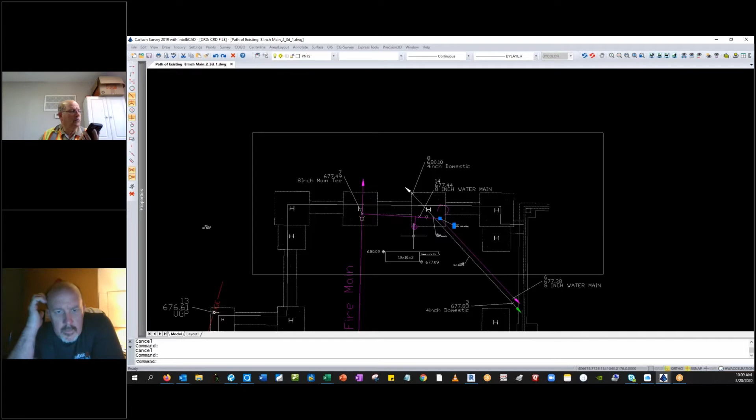Zoom into that where your mouse is right now, just a couple clicks. I just want to look here. So you've got a 45, a straight piece. Is that a clean out to the left? No, that's a PIV valve sticking up out of the ground. And that's a fire hydrant over there.

So there's a line going from the fire hydrant to the main. Yeah, a little bit short one there. Really, I don't even care about the fire hydrant or the PIV, I could have eliminated those.

It's just really the main focus is just the 8-inch line, the 4-inch domestic running here, and then the footers themselves. This thing here is a piece of concrete around the 45. I can take that off too.

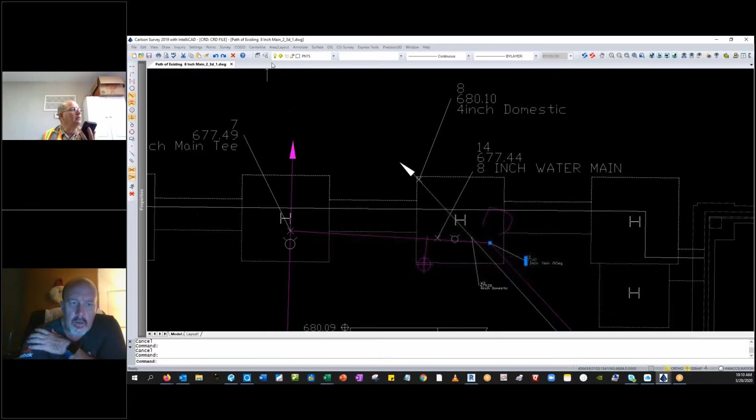Do you have the dimensions between them? You mean like from here to here, or from here to here? From the column line to column line. Oh yeah, right to left. I took the column line off of them, but I can get that.

Okay, about 20 foot. 20 foot center. So let's go into Revit.

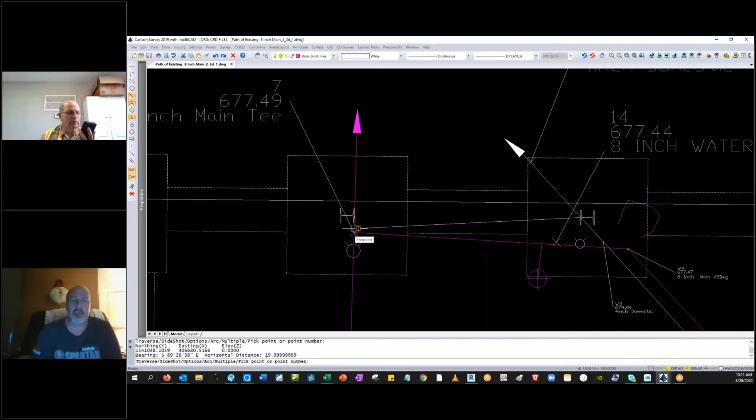Same screen. I went into a construction tab. That's where I saw. That's fine, that's fine. Go ahead and go to level 1 on your project browser.

Double click that. There we go, I did. All right, so let's go ahead and run up there to under - it's in datum, it's all the way to the right. You're going to see grids.

Keep going right. Keep going down, there you go. Go ahead and click on that. And then what you're going to do is go down into the model space.

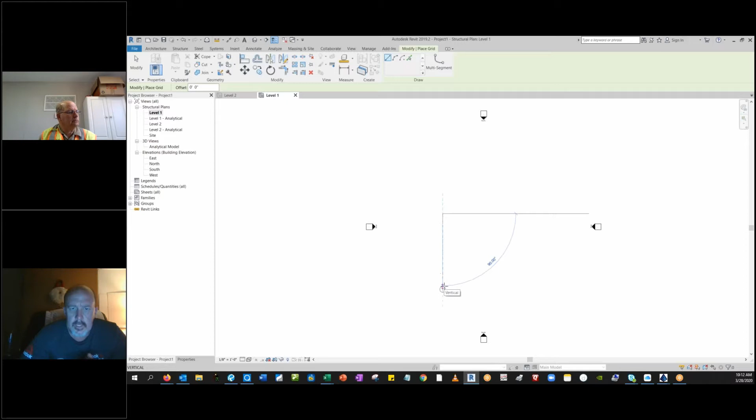Yeah, that sounds good. So let's go ahead and click there. Drop your mouse down a little bit and click there. And then move your mouse up and to the right.

And then type in 20, and hit enter. And then pull your mouse down until it lines up with the other one. You'll see a little blue dotted line. There you go, click there.

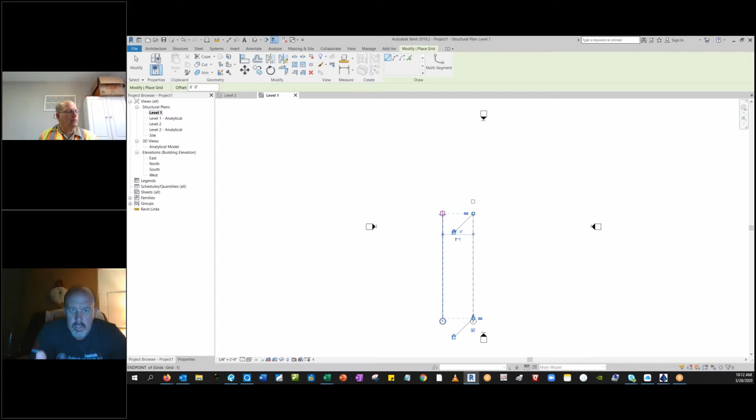And then go over to the left and up, we'll do it closer to the top. And then go to the left, and then go down a little bit. There, keep going down about right there. So go ahead and click there and then go to the right.

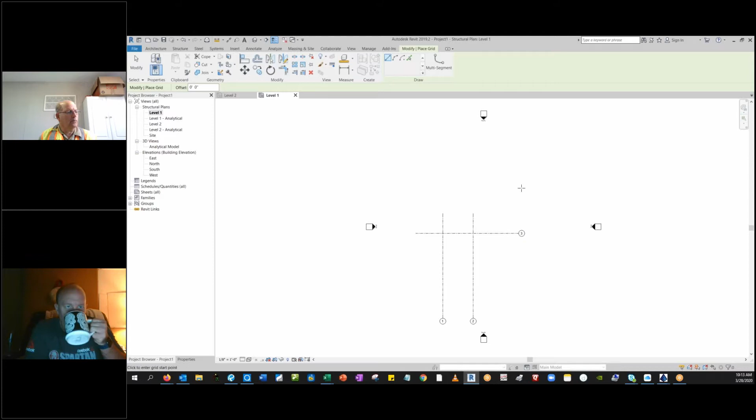All right, right there, and go ahead and click. Now go to the modify button, we're done with the grids for now. Keep going to the left a little bit. Yep, that one right there.

Okay, so now what we're going to do is go into the structure tab, which is right next to the architectural tab up at the top left. There you go.

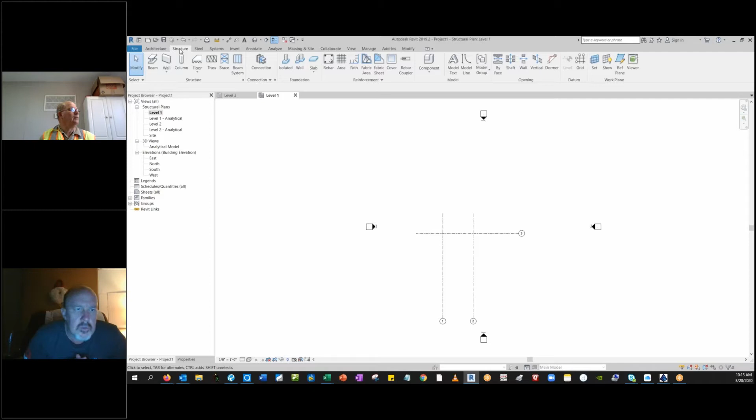And we're going to do isolated foundations. So go over there, down a little bit to the right. There, one more or two left, three, four left, two left. There you go.

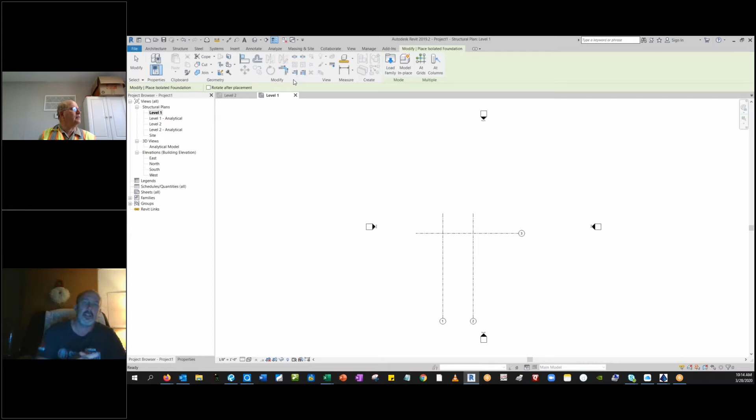And what we're going to do is go down to the properties palette down there at the bottom. Go ahead and click on that and then go up into edit type up towards the top.

And then we're gonna rename this. So up there, up and to the right a little bit. Down, yep, rename. And this is a 10 by 10?

Yes. Okay, so is it designated like F1, F2, or anything like that? Yeah, F10. Okay, so just type in F10. And then once you go ahead and hit OK there, change your foundation thickness, width, and length.

Okay. Hit apply, yep, and then OK.

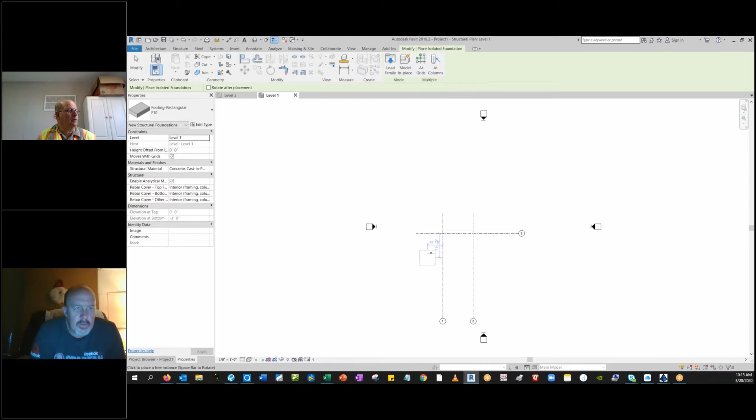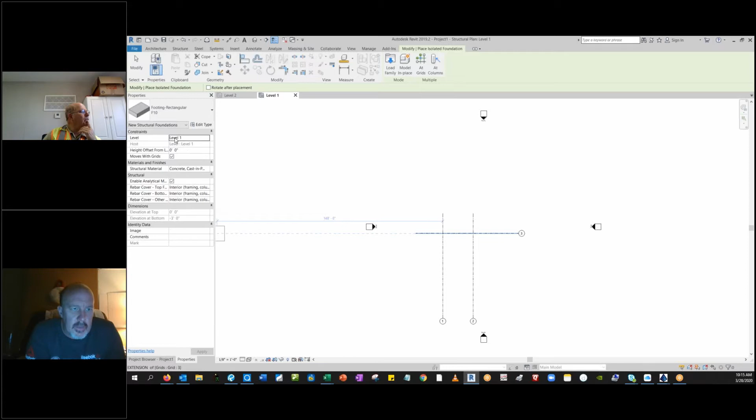Now over there on the left, how far down below finished floor do these sit? 5 foot. So you see up underneath where it says footing rectangular, and then you go down into the constraints where it says level, level 1, height offset from level. So 2 boxes down, click in there and do -5.

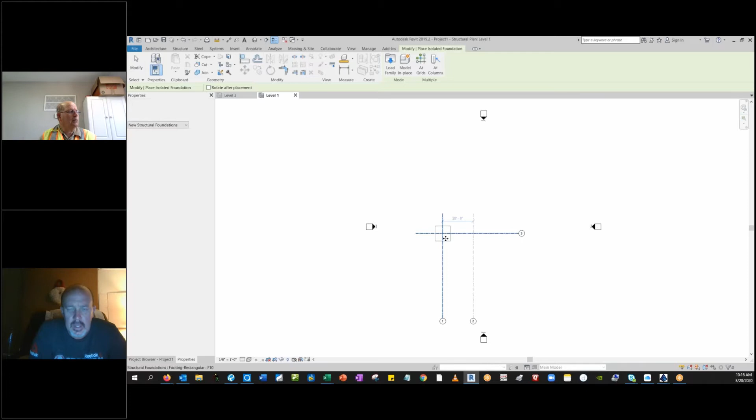Now move your mouse back over and then go to the intersection of those 2 grid lines and go ahead and click. There you go. And then go up to hit the modify button, or you can hit the escape key.

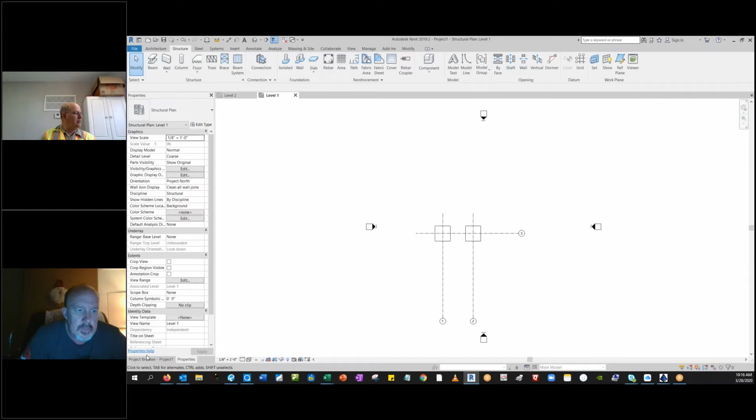All right, so now I want you to go back to your project browser. We're going to drop down to a 3D view. So down to the project browser, the bottom left, and see where it says 3D views.

We got analytical model. Go to manage. Manage tab up at the top, right around the middle. Up, up, to the left a little bit. There you go. And I was incorrect, go to the view tab. To the right, it was just next to the manage tab. To the left. Oh, there. There you go. And then we're going to do a 3D view.

See that little house down and to the left one? Go ahead and click on that. Yep.

All right, so you can see I kind of wanted to get this view so that we can see how things are running. So go back to your level 1. If you go up to the right, you're going to see level 2 tab, level 1 tab. Yeah, that way we can switch back and forth.

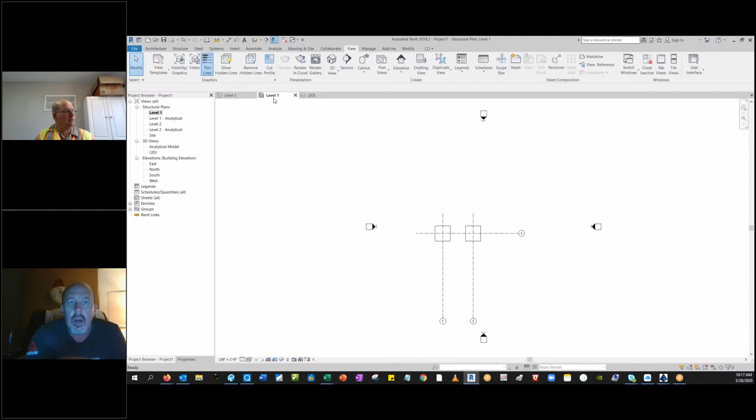Okay, go up to your add-ins tab, up and to the right. Let me see what you have. You don't have APL.

Is this job on True North? Slightly off. I'd have to check to see what the actual is, I mean, I can rotate it or whatever when I need to. No, that's fine, go ahead and drop into Carlson.

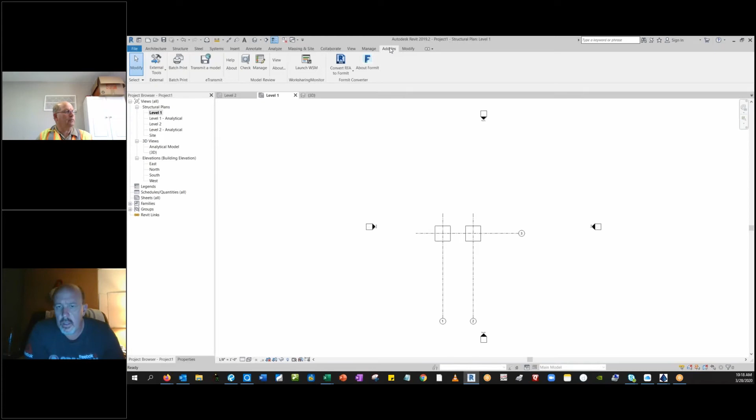Just open up your Carlson tab. Yeah, it is off a little bit, just a shade. 3322. Okay, go back into Revit.

These connector footers, do you want to add those as we go? We will. Really have to.

Do me a favor, pull that properties palette. There you go. Okay, all right, so what we need are the coordinates for the corners of those footings, we need 2. So whichever corners you want to use, we just need to have those ready.

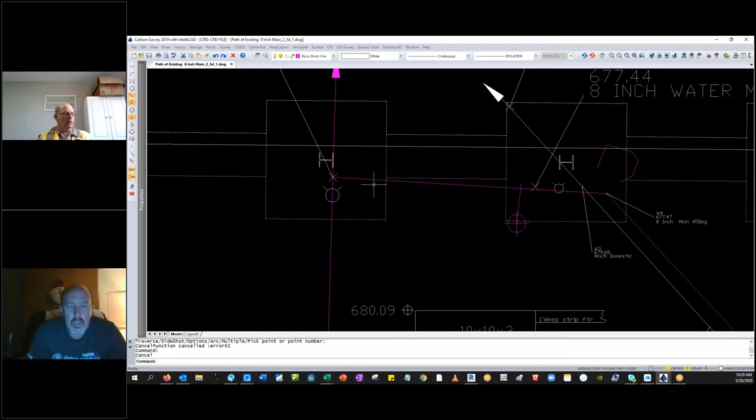Okay, I've got a CRD file and an Excel file in the folder that I sent you, and I have them here, of course. I can flip over to here, and I'll plot all those points and find out which ones we need. Let's see.

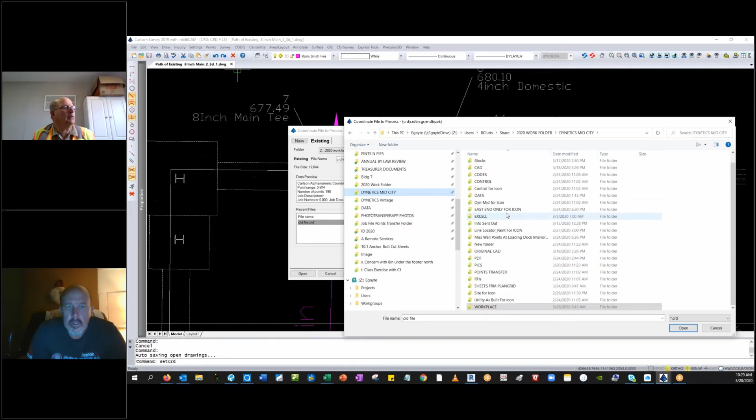Okay, just like this one footing? Yeah, we just need 2 points, so that footing will be fine.

105 and 106, okay, so let me get all that back off there. 105, 106. Now let's see, I need to manually type them in. Yeah, we're gonna manually input these. Okay, let me do this.

Yeah, you can throw that up on your other screen. I bring home my Yeti. Oh, I did, what color? Black, I don't even see it. My Yeti color? Your Yeti? Well, it's yours, but it's mine now.

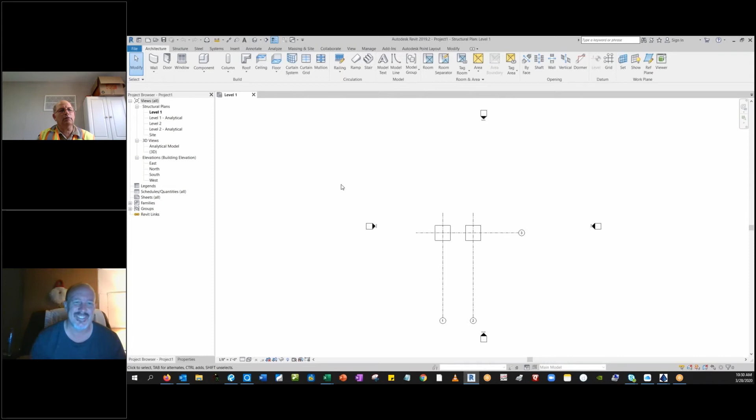Okay, all right, I've got the coordinates ready, and let's see, let me get that off here. Okay, I've got them on another screen where I can see them.

Okay, so go ahead and pull up Revit again, and we're going to go to the Autodesk Point Layout tab up at the top. It's about the middle of the screen. Yeah, when you say tab, are you talking up here? Yeah, those are tabs. So the APL is going to be about 5 to the right. Autodesk Point Layout, go ahead and then go ahead and get license.

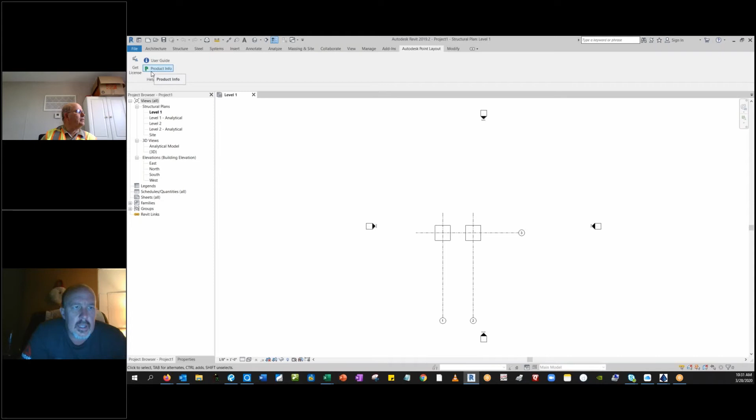Yep. Now you'll have to get a license every time you want to use this, but as long as you're on the network, you can get it. We have 3 seats, and not a lot of people use it.

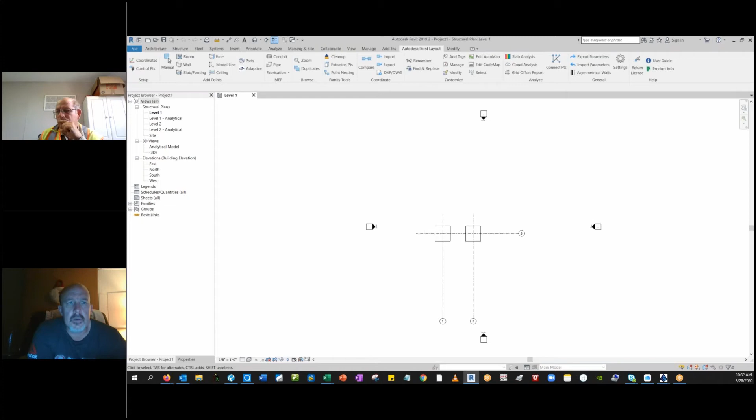So something pop up on your screen, on another screen? Single user or multi-user? Multi-user, yeah. It's got enter serial number. Did you do multi-user? I can click either one. Yeah, go ahead and hit multi-user. Okay, there we go.

Okay, so with APL, what we're going to do first off is we have to set the shared coordinate system for this. So all the way over to the left is going to be the coordinates tab, or the coordinates button. Go ahead and click on that. And we're going to do this in decimal feet, and we're going to do work plane.

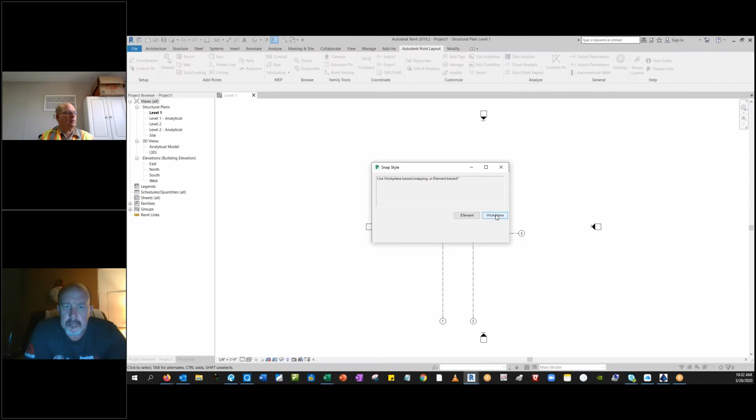So go down to where your point number 105 is going to be. This goes in easting, comma, northing, comma, elevation. We're doing the top of the foundation, right? Right, so we're going to do the easting first.

Okay, and then comma. Let me see if I did that right. 406656, 0526, good, 154, 1043, 343.

Can I copy and paste these? No, probably not. Okay, got it, go ahead and hit OK.

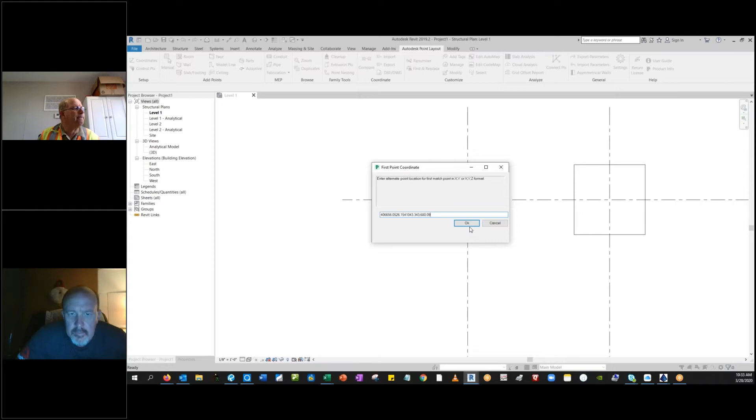Now do the other corner, number 106. Same thing. Okay, go ahead and hit OK. Oh yeah, check your numbers.

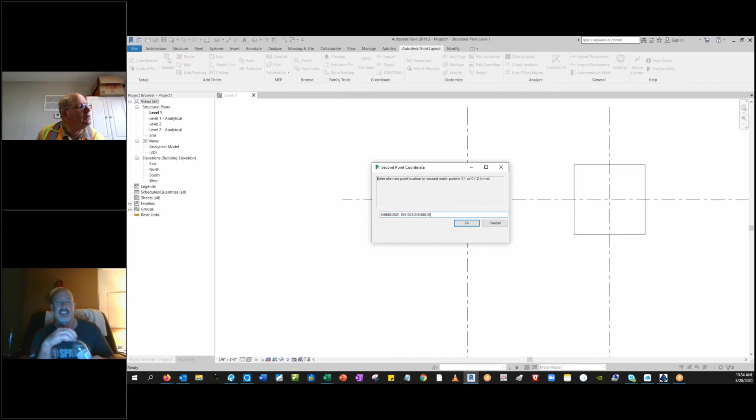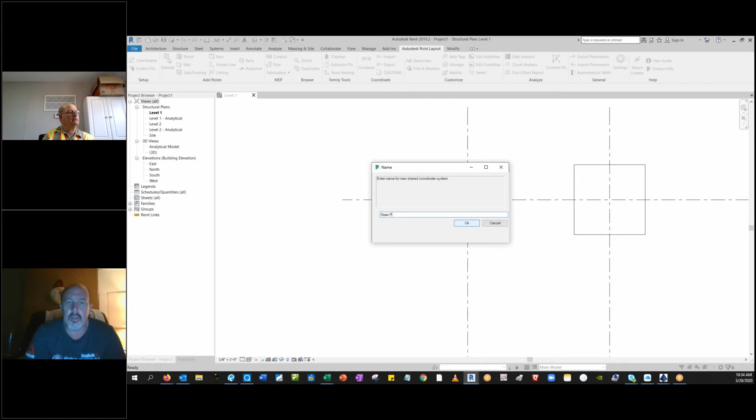All right, so I usually name it state plane just so I have it always, because you're working in state plane coordinates, right? Yes, so I usually do that and hit OK. All right, so I might have to break in just a minute to do something.

That's fine, let's go ahead. You have the points for the pipe, right? Yes, on a CSV. So go ahead and go to the import button right in the middle, just underneath add-ins. What we're going to do now is import those points for the pipe in.

So up at the top of the screen under add-ins, it's still going to be in the Autodesk Point Layout tab, but it's just located under add-ins. Down and to the right four. To the right, up, left. There you go, import.

All right, go down to select file to import, up at the top. Left, all the way, yeah, there you go. Okay, do I not have to worry about none of that, right? Not yet, not yet.

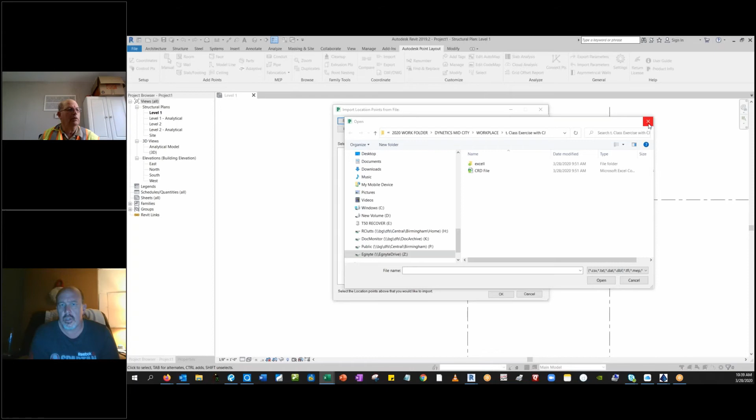Okay, I'm not really using it in Excel, because we just imported a CRD file that I made from Excel, but I do have the CRD file connected to the CAD that I'm using -- I mean the Carlson that I'm using. Don't close that, don't close that.

Let me change that, let's see. Well, I see -- no, you've got Excel open up at the bottom of the screen. Well, I do, but I mean, I didn't import Excel. I just used the Excel to create the CRD, which is what I just now imported, and it's right now actively being used by this one here.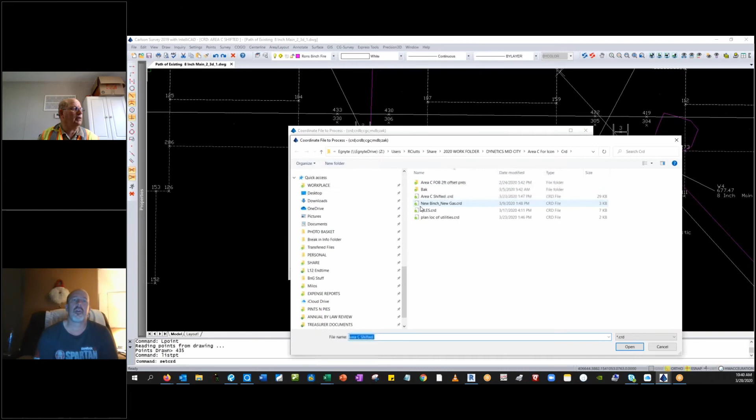So I could actually put another type file on there. Okay, so I'll just hook it to anything. Now it's not connected with it anymore. Okay, going back to Revit and importing.

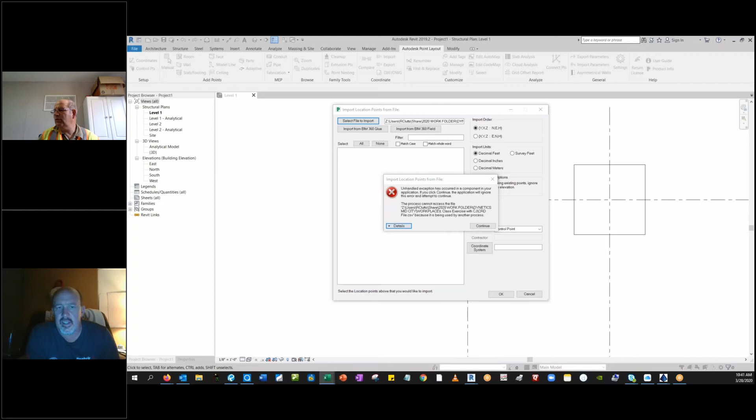File to import, CRD, open. Same thing. All right, I don't know, go ahead and close any connection out of Excel. Now try it, hit continue. It's still closing, okay. Now those are closed.

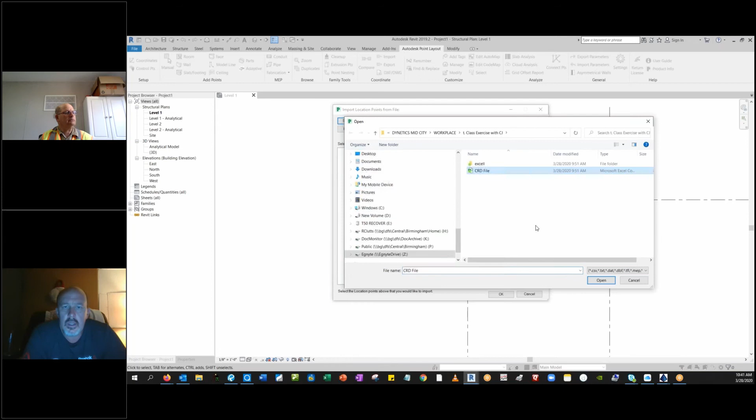I'll continue here. Yep. Now, let's go ahead and try that again. Select file to import. There we go. Okay, are all those what you need? Yeah, I think it's just the top 20 or so, right?

Yeah, I don't know why I got all this other stuff here. That's okay, just go ahead where it says up at the top, select all or none. Go ahead and select none. Okay, this XY thing -- never mind, just do what you say.

Okay, none. And then it looks like you want the 4-inch domestic, 8-inch water main, 8-inch water main, 4-inch domestic -- you need those, right? There you go.

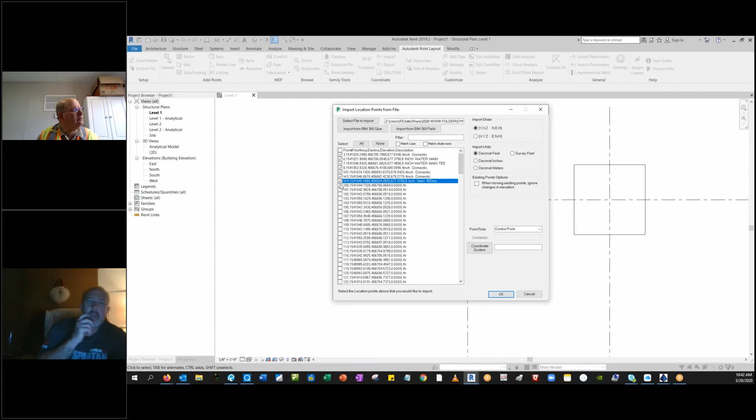Okay, so is that coordinate order northing, easting, elevation? Yeah. Okay, then the import order is good. Drop down to where it says coordinate system.

Now you don't have all the edges of your footers. We don't need those right now. Don't need those right now. Okay, all right, now.

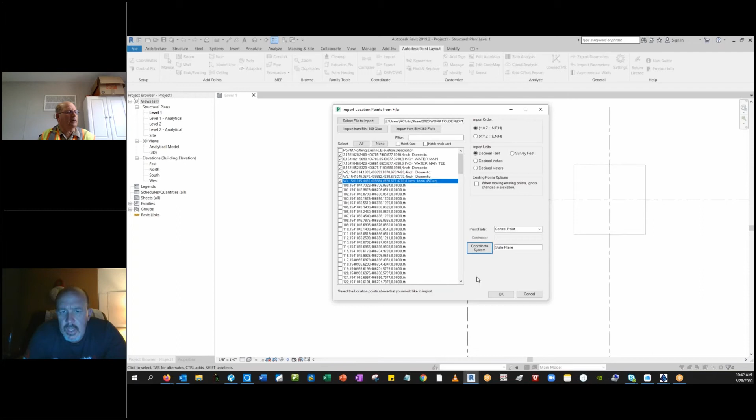The box where it says coordinate system, to the right a little bit, click on that. And then click state plane, hit OK. Now hit OK. And we're going to call it pipe.

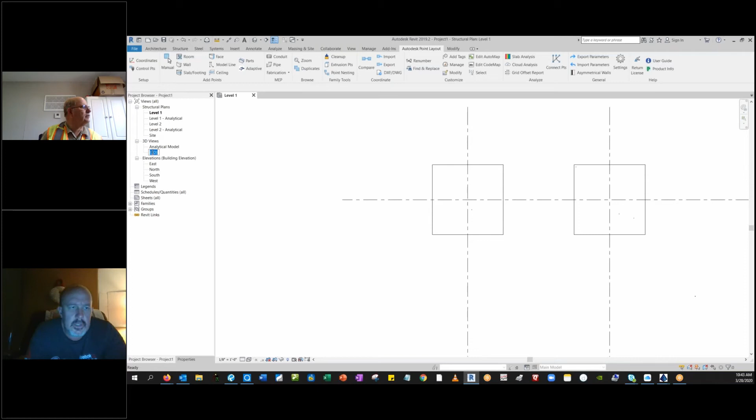And then go into your 3D view, so double click your 3D view to the left in your project browser. Yep, down, okay, one more. Double click that. Select off of it and try it again.

There we go. Okay, zoom in, and I believe we can see those points now.

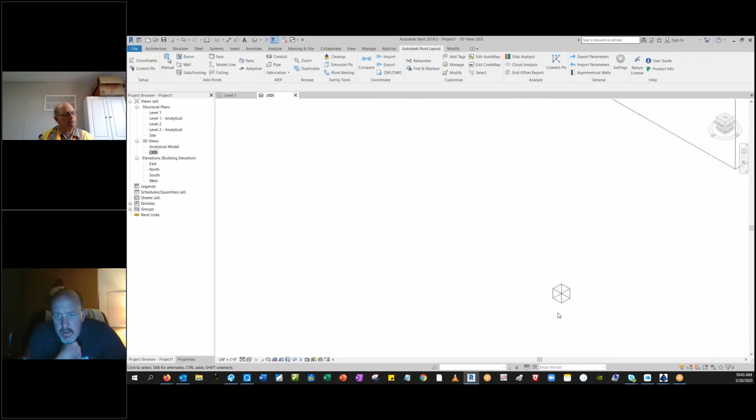Now, one thing that Revit doesn't do is label them on the screen. So what we're going to do is go up into connect points, to the right about 3 or 4, and then we're going to do filter.

All right, so if you scroll down, you want to do the 8-inch water, 8-inch main, 8-inch 45 degree, 8-inch tee, then hit apply. Yeah, we got it, hit apply.

All right, so you should have 3 points, right? Yes. See, that's the tee, that's the 45. Don't show the other one. That's okay, go ahead and hit OK. 45.

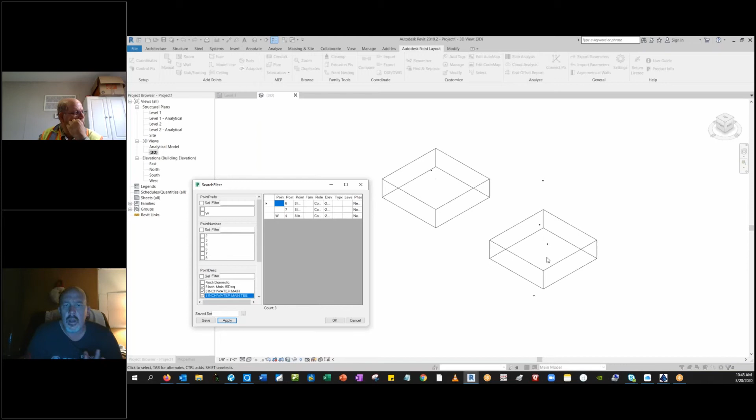And we're going to connect it with pipe, and we're going to do numerical. Top.

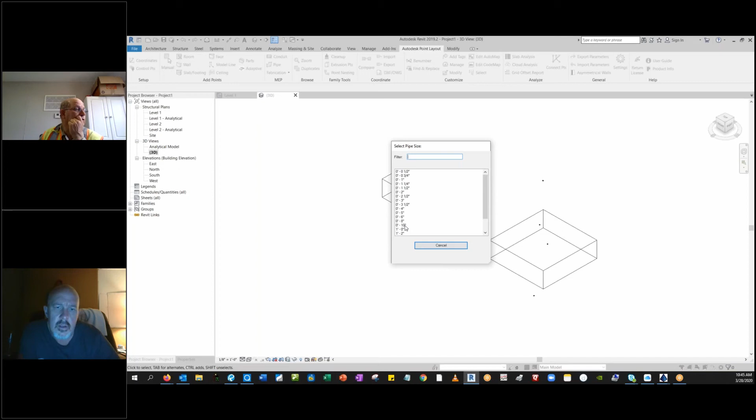Okay, apparently numerical wasn't going to work. I think from right here to right there, that's the 8. Okay, so let's try that again.

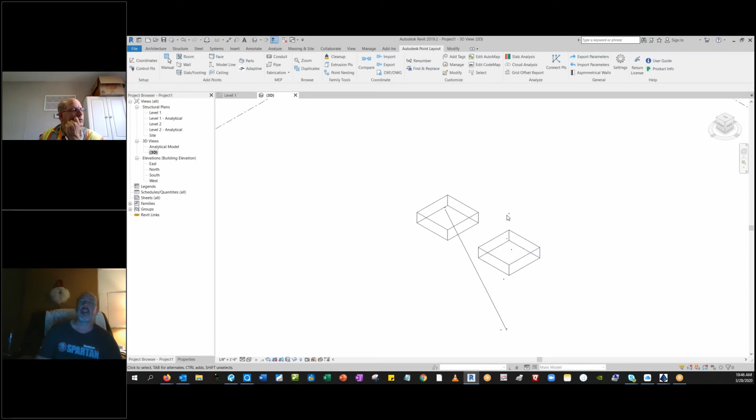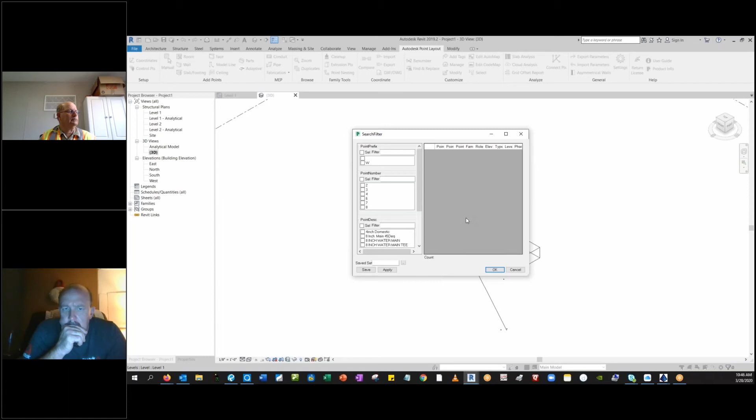Let's go back into connect points. Do I go backwards on my steps? No, we're going to delete that in a little bit. Okay, let's do filter again. Go ahead and select those 8 inches again. Hit apply. Oh no, back up. Yeah, you'll have to close it and restart it.

Hit apply. Yep, and then hit OK. Now this time we're going to do the same thing, pipe, but this time we're going to do all.

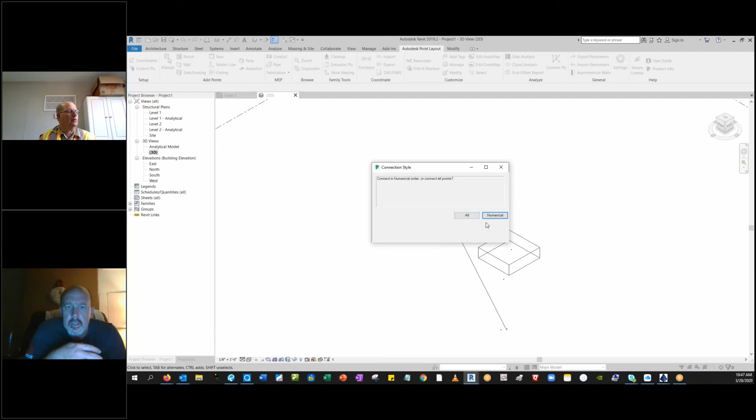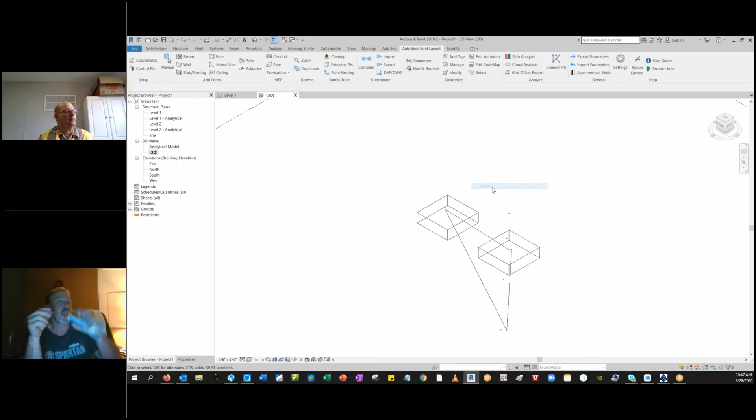There we go. Now go ahead and delete the one that's going in between the first and the last. Same, you'll have to do it again because we made 2 pipes there. Might have to do it a couple times. Hit the delete key. Is that what you normally do? Yeah, you can hit the delete key. All right, there we go.

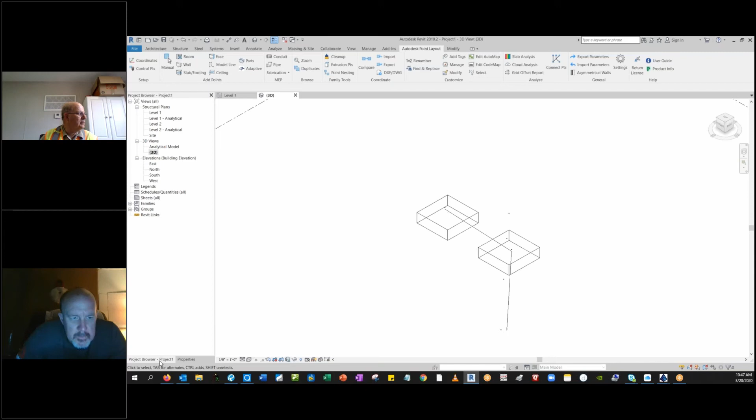All right, so in order to see this a little bit better, go down to the bottom left corner of the screen. You're going to see a checkerboard to the right, left down, left 2, one more. Yep, that one right there. Go ahead and click on that and do fine.

And then the one next to it to the right, go ahead and click on that, and do shaded. Oh, now rotate that a little bit. So how do you rotate? Hold your shift key, hold your middle mouse wheel, and push.

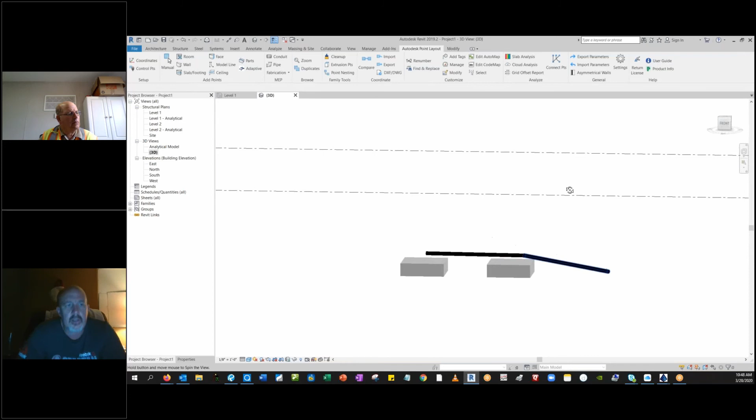Does that look right? No. Okay, should be below the footer. Go ahead and select those 2 pieces of pipe.

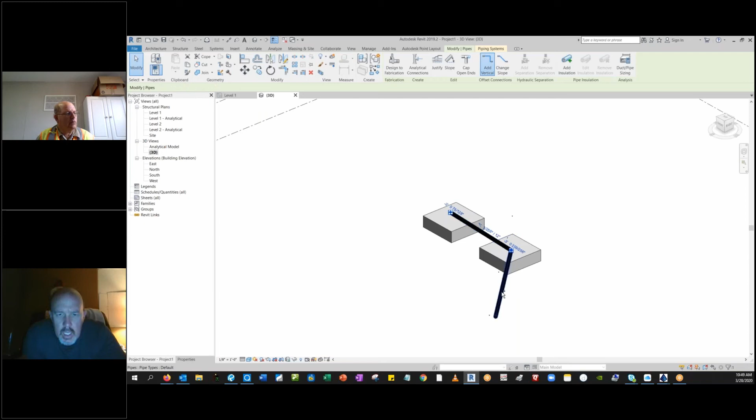Sometimes this happens, I have some problems with it, but go ahead and hold your control key and then select both of them. That's that one, I want to select both. What's still there? Let's see.

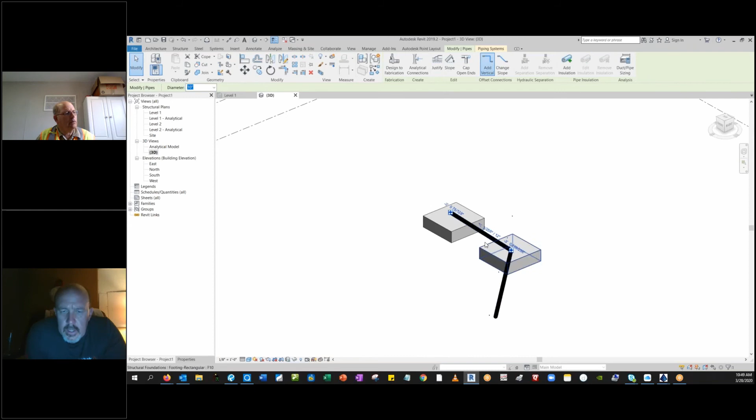Okay, hold on just a second. Zoom in for a minute right there at the end of the pipe. Turn it around, I want to be able to see that point. Okay, so that point is saying it's above the footing. Go ahead and select that pipe.

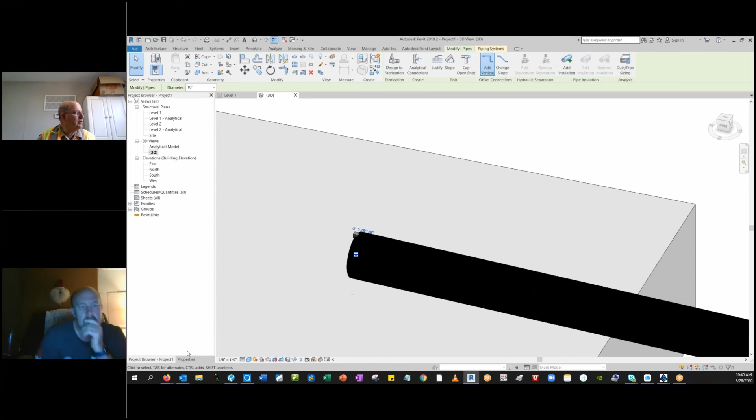Turn on your properties palette. Okay. Yeah, right there. Go ahead and click on the properties palette. There we go, all right, let's see here. Scroll down.

That number right there, is that supposed to be the top of the pipe right now, if everything's right? Or is that something else? I'm not sure why it's saying -3. Okay, you're below finished floor -3 foot, but your foundation's at 5 foot below finished floor, right? Right, and then that's going to end up being almost 8 feet below when it's done.

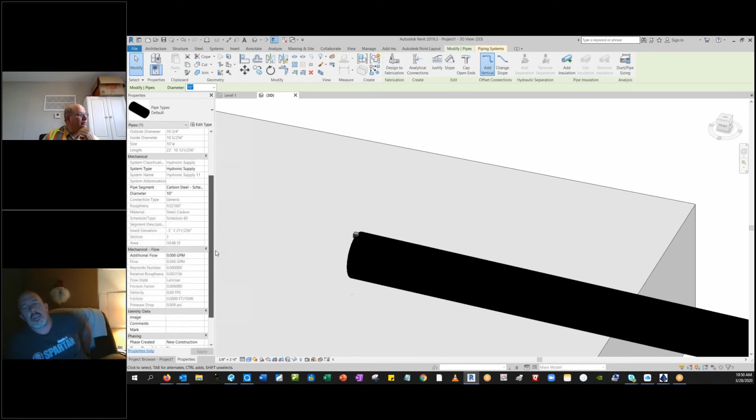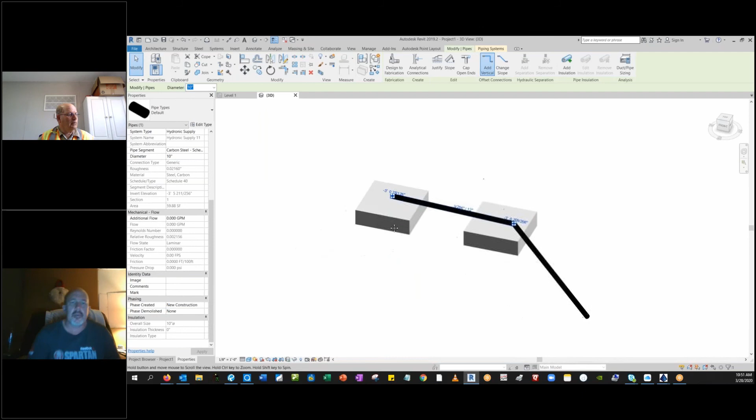So do this. Let's hit escape a couple times and select that foundation. -5. Okay, go over to the annotate tab. Left 2, 3, yep, right. Yeah, that one right there. And do spot elevation, one below it. And then hover over the top of that foundation. -5 foot.

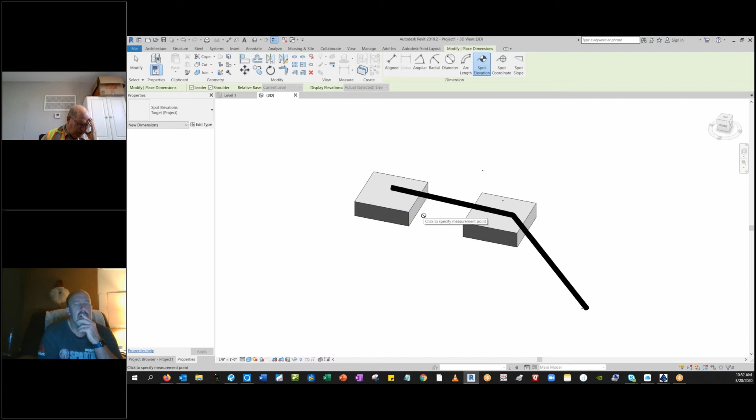What was the... I don't know that we ever established that. See, I put the elevation of those points in as 680, that's 680.09.

These here, what's your finished floor? 685.09. So when we put those two corner points of this in, I put in 680.09. That should have been right.

And then what's your elevation for those points? These points on the pipe. On the pipe itself, they're whatever I shot them at.

Let's see, you still got that up on the screen over there? I can put it on the other side where I can see it. Let's see... pipes. 45 is 640, 677.47. That's this corner right here.

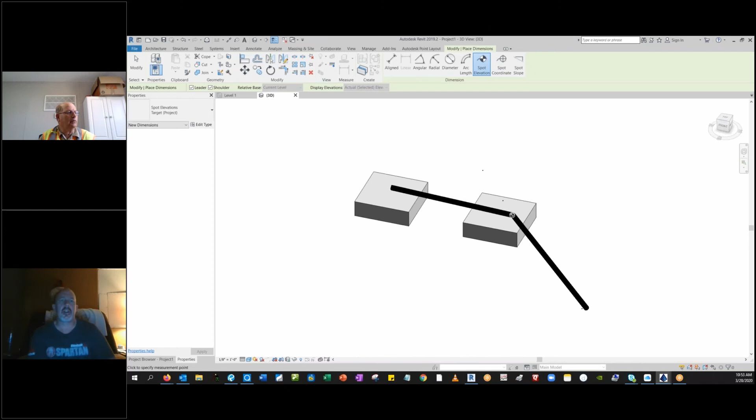Go ahead and zoom in, hit escape a couple times, and then select the point. Hit escape, and then select that point. Negative 2... oh, why is that?

Do me a favor, hit escape a couple times, zoom out a little bit. Select one of those foundations. Hit your control key and select the other foundation. Now go over there where it says height offset from level, hit zero.

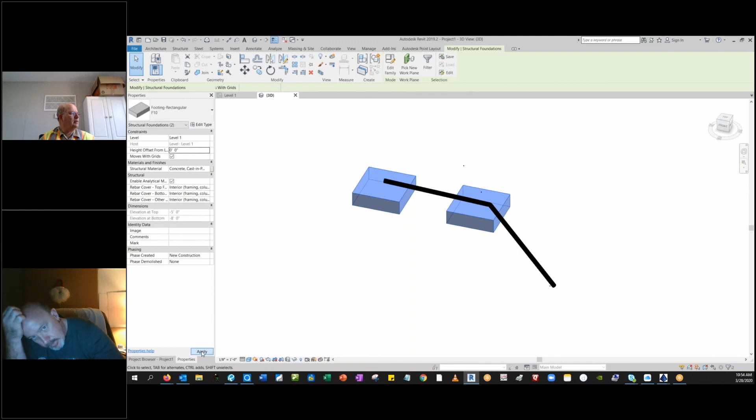Hit enter, now move the mouse over into the model space. Okay, now is that what it really looks like? Let's see, hit escape a couple times. See, shift. Yes, okay, yes, that's correct.

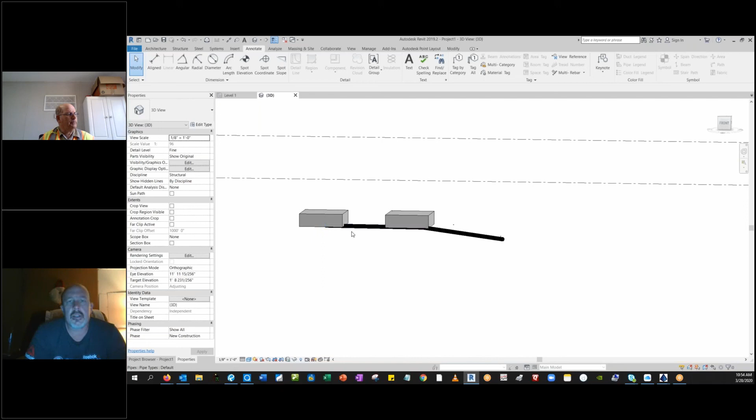Okay, APL's doing something a little wonky, no big deal. Okay, okay, so now let's go back to Autodesk Point Layout.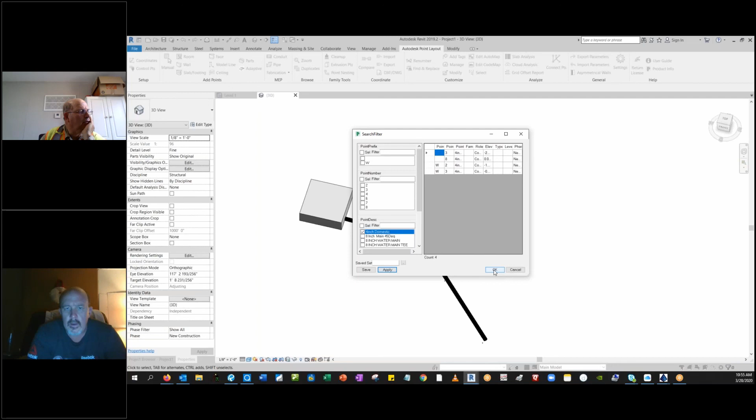All right, filter. 4-inch domestic. Hit apply. Hit OK. Pipe.

Let's do numerical, let's try numerical. And then what do you think that is? 5-inch OD? That would be fine.

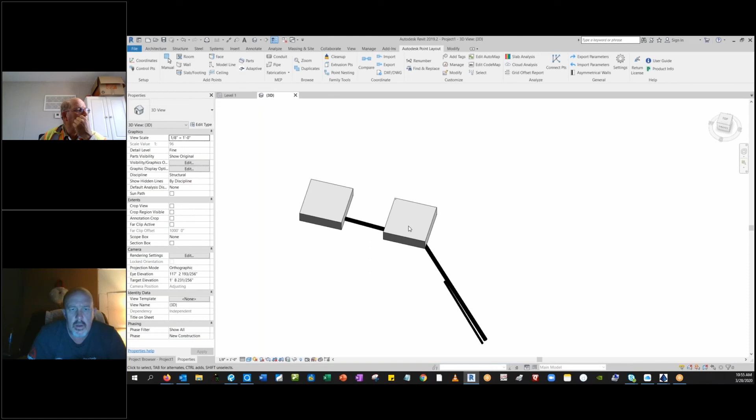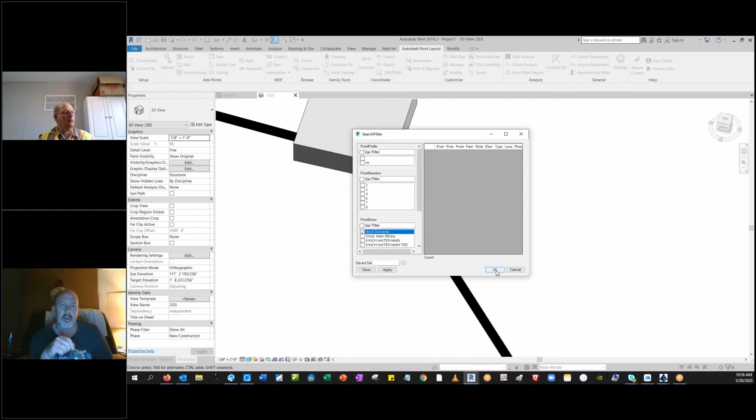Okay, all right, it didn't work. It did one section of it. Okay, go ahead and delete that one, and let's do all of it. I think it's because the point numbers aren't numerical. Hit apply. Yep.

Let's do all. Okay, now rotate that around a little bit. We had more points than that, right?

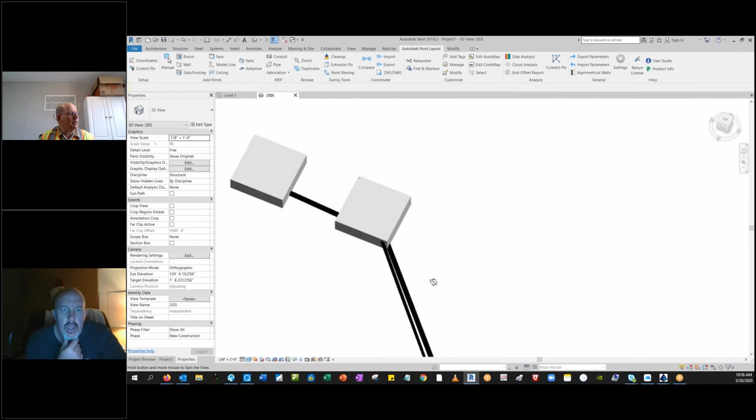Not really. This here, see that point right there? It's not showing it, but that 4-inch domestic literally goes through that foundation. Okay, so you do this.

Go down to where it says where we did shaded. Yep, one to the right. Yeah, click on that one. Click wireframe.

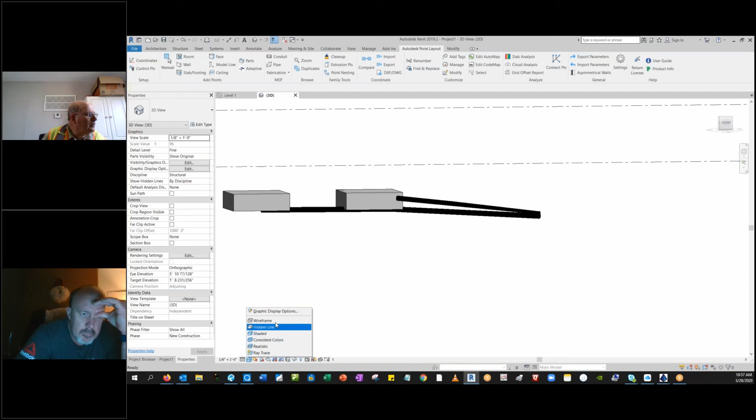Now, are those the two ends of that pipe? Oh, they miss each other. Okay.

I gotcha. Okay, so what I would do at this point, and this is just how I used to do things, I would take a couple screenshots at different angles, print them out, usually as a PDF or whatever, and show the project manager or superintendent what's going on. Then you can use this when they come in on Monday or whenever and show them actually what's going on.

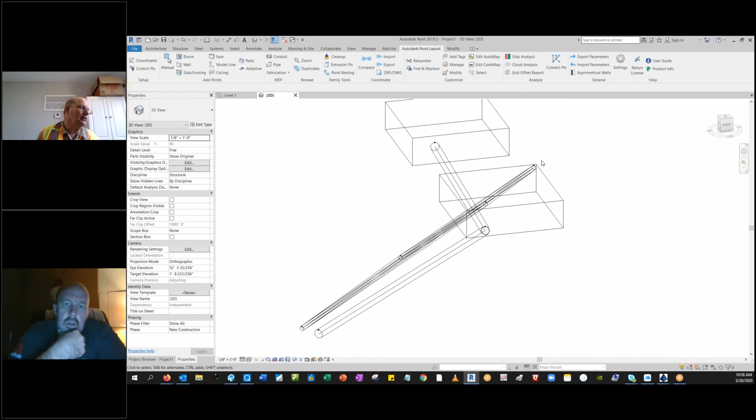Okay, is there any way to extend this pipe a little further, even though I didn't shoot that point that way, so you can see it coming out? Go ahead and zoom into that pipe.

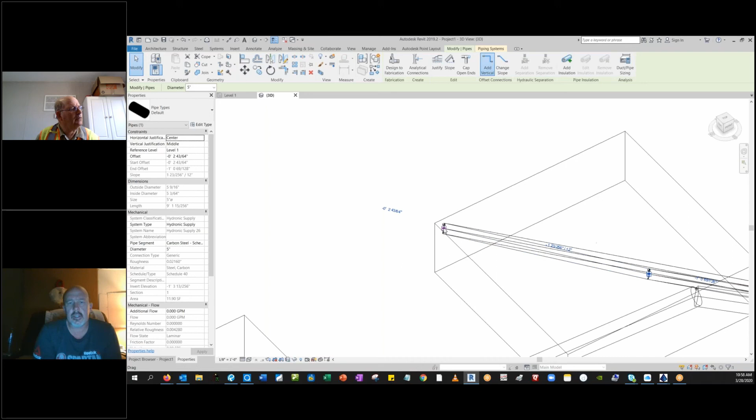And then click on one of those pipes going through there. Zoom out a little bit. And then see that little box at the end? Click and drag. Keep going... actually, that's fine right there.

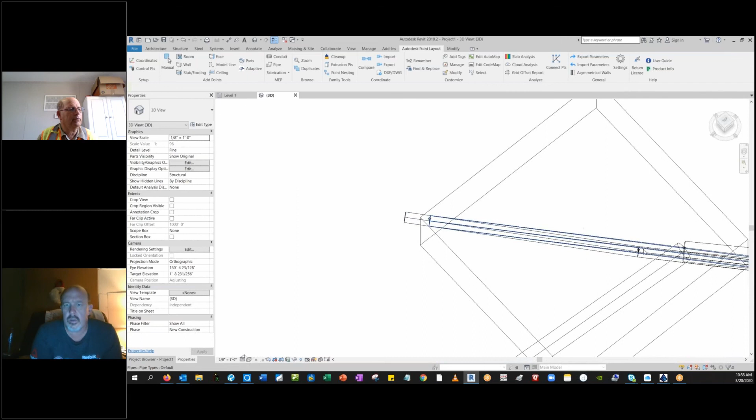Okay, roll that around a little bit, just make sure it didn't get all crazy on you. Oh, that's wonderful. You know, all these funky lines here, I think it's because my points are not in a straight line. And what you can do - so I don't know if I can get control.

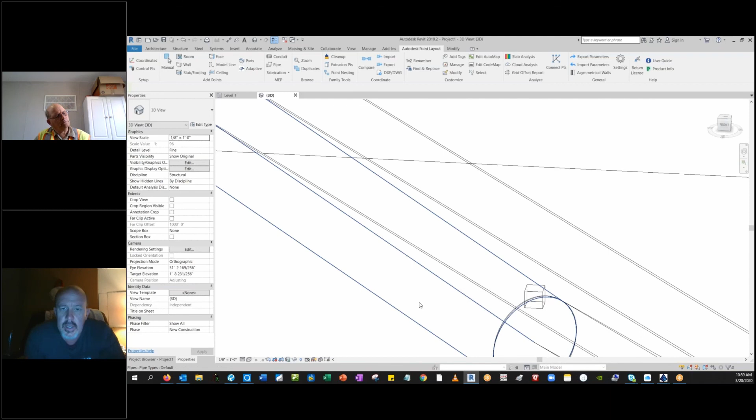Okay, zoom in to the second point, the one that's in the foundation right there. Okay, keep going in, keep going in. Okay, right there. So you can see, because we did auto connection, there's going to be multiple lines going in between. Move your mouse to the right and up, keep going up, keep going, keep going.

Click on that one. Down a little bit, down a little bit. There you go, click on that one. Got two side by side. Okay, one, go ahead and click on that one.

Hit your delete key. Delete, okay, deleting. Do I need to save this for deleting thing? Yeah, go ahead and do a save.

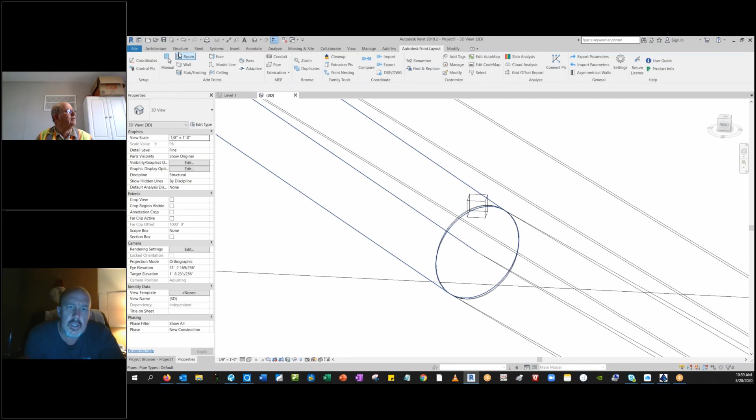Okay, if you go all the way up to the top - well, you've already saved the project, you can just hit save and it'll save that. Oh, here, yeah, right there. Okay, done. Alrighty.

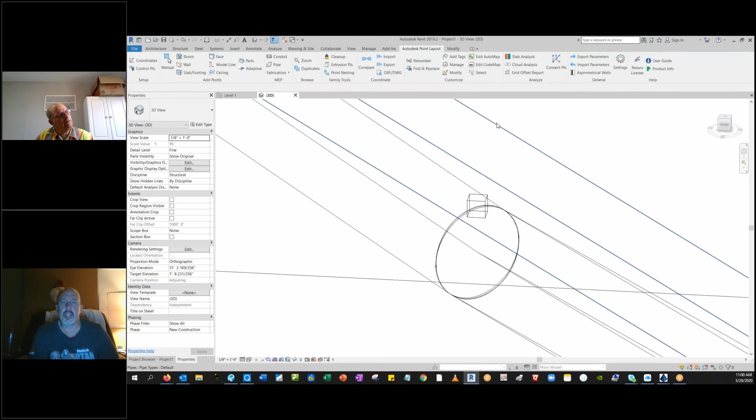Okay, I'll go ahead click and delete. Hit that, delete, hit that. Yeah, because it's got a bunch of pipes in there, but you can go ahead and keep deleting them.

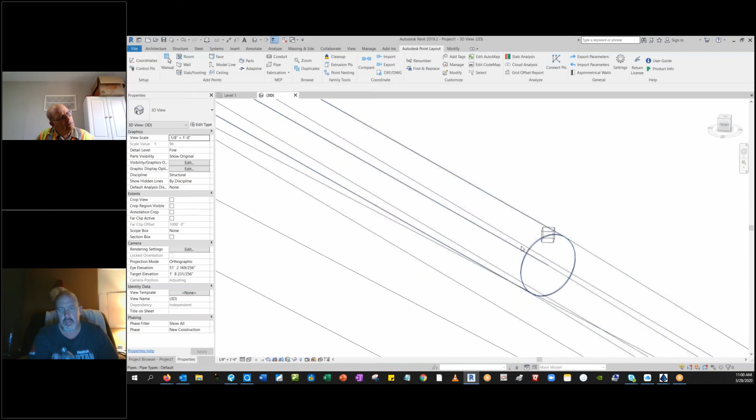And then it'll give you a good representation of point to point to point. Oh, there you go, there you go. Yep, that's real. Now, I still got the same thing going on here, don't I? Yep, you may rotate it a little bit more to get more of a top-down view. There you go, zoom back in there.